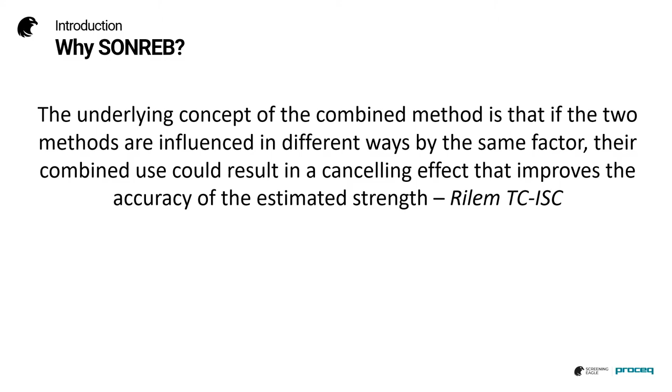The underlying concept of the combined method is that if the two methods are influenced in different ways by the same factor, their combined use could result in a cancelling effect that improves the accuracy of the estimated strength. For example, if we have increased moisture content, the ultrasonic pulse velocity value increases, whereas the rebound value decreases.

This is what EN 13791 has to say about SONREB. The combined use of both UPV and rebound hammer techniques with core strength is a useful technique, but the procedures are not detailed in this document. There are some countries such as Italy and China, for example, where the SONREB method is very well known and there are national guidelines for it.

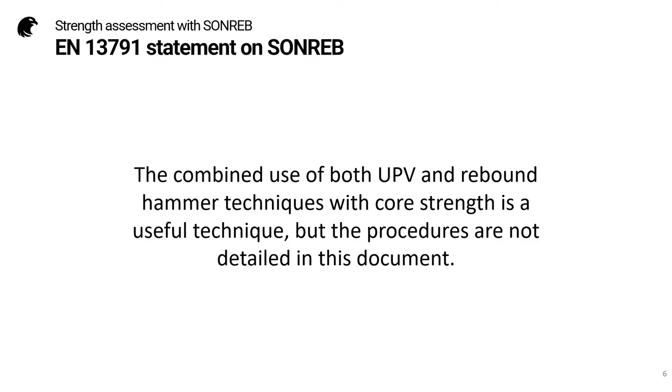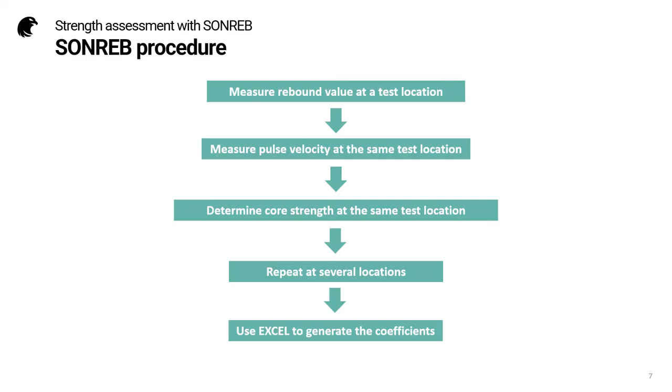And here we can see the SONREB procedure. We measure the rebound value at a test location. We measure the pulse velocity at the same test location. Then we determine the core strength at the same test location. We repeat this at sufficient locations and then use Excel to generate the coefficients.

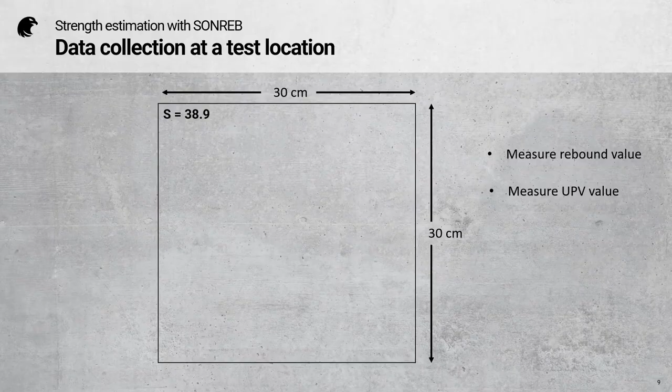Taking it step by step, we first define our test location. In the European standards, this should be approximately 30 by 30 centimeters, and we measure the rebound value. Now at the same test location, we measure the ultrasonic pulse velocity. And the final step is to take a core and determine the core strength.

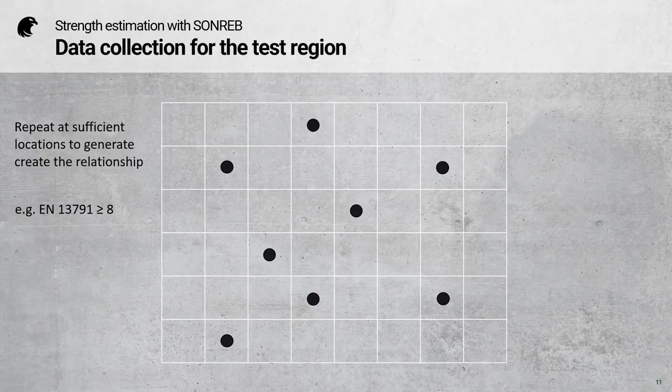And then we repeat this at sufficient locations to generate the relationship. In the European standard, we need at least 8. And now we should have sufficient data to generate the coefficients. Once again, for my example, I'm going to take the data supplied by LNEC in Portugal.

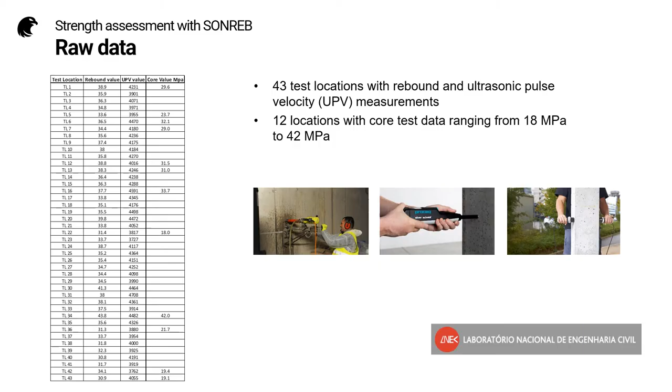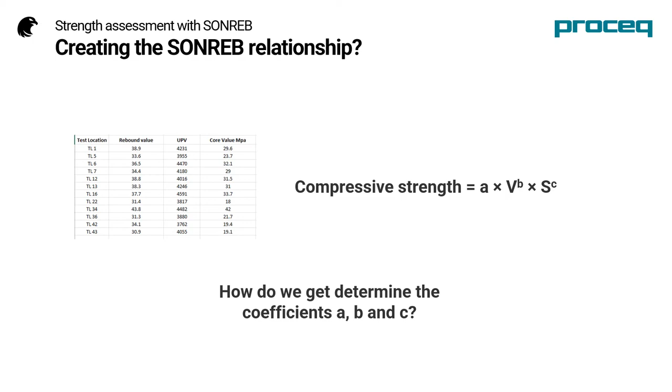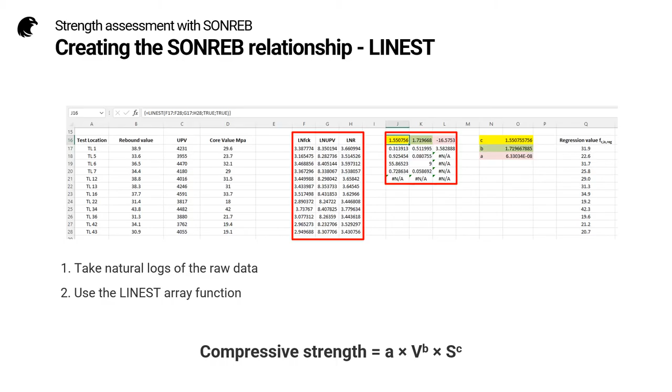Here we can see the raw data, but how do we go about getting the coefficients A, B and C? We cannot use a simple scatter chart as we did previously because we have 3 variables. The way to do it in Excel is to use an array function called LINEST. The first step is to take natural logs of the raw data, and then we use the LINEST array function on this, and finally we obtain the 3 coefficients.

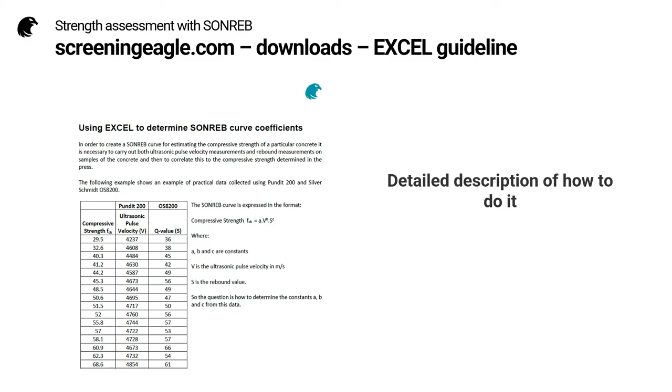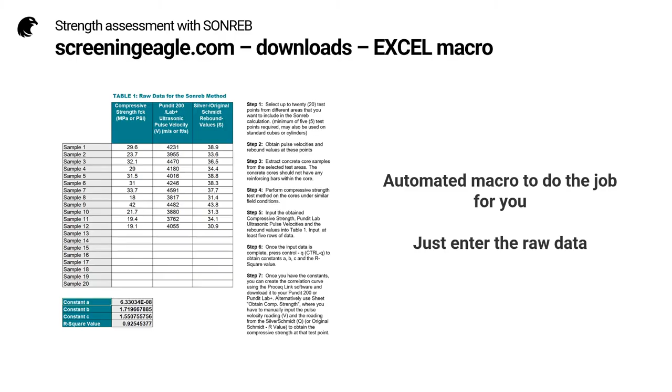If you're not familiar with the LINEST function, don't worry, because help is available on the screeningeagle.com website in the downloads section. There you will find a detailed guideline on how to determine the SONREB coefficients using Excel. Even simpler, there is an automated macro which does the job for you. Just enter the raw data to obtain the coefficients.

Now let's analyze the results to see if the method has brought us anything. We're going to compare 3 cases. First is with rebound hammer alone. The second is with the UPV, and the third is with SONREB. So case 1 is the rebound hammer strength estimation, and here you can see the graph of the regression value against the core strength value, and we have an 86% coefficient of determination.

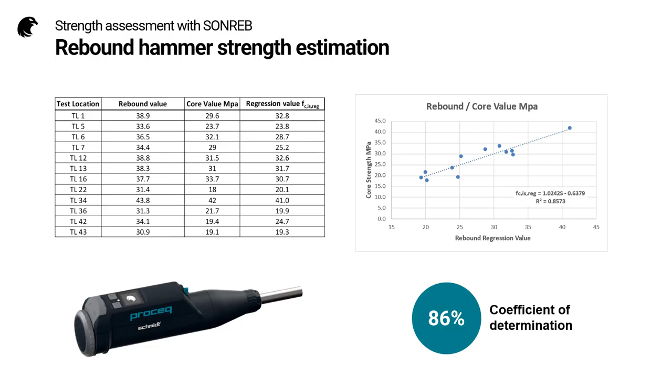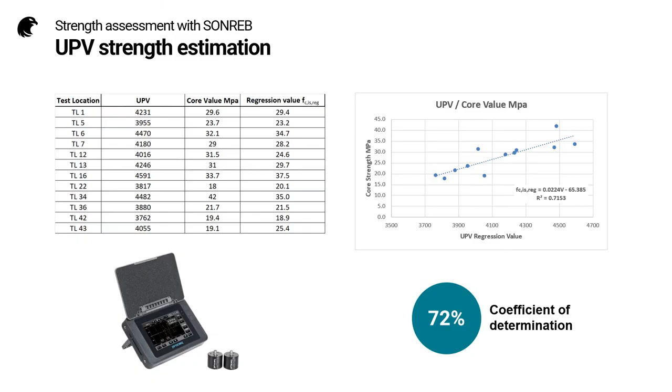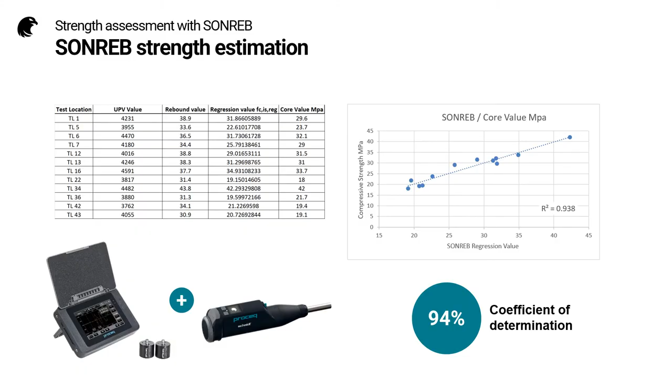Case 2 is to use the UPV regression, and in this case we have a 72% coefficient of determination. And finally, we will use the SONREB regression. And you can see in this case, we have a 94% coefficient of determination, which is a significant improvement on the estimate. And this is why people are drawn to use the SONREB method.

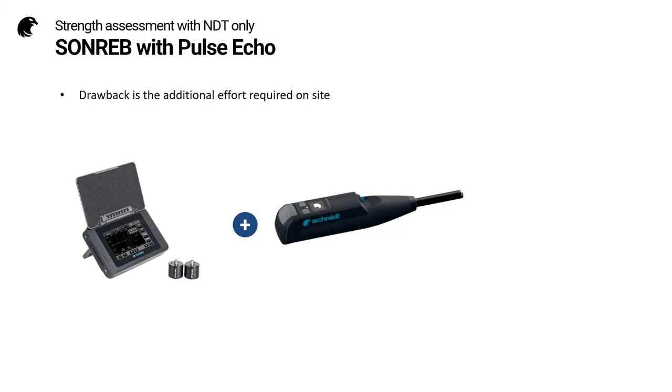The main drawback to the SONREB method is the additional effort required on site, but this effort can be significantly reduced if we use pulse echo to measure the pulse velocity, and this is a technique which I first saw successfully demonstrated at an FIB conference back in 2016, and of course since that time the pulse echo technique has become standardized.

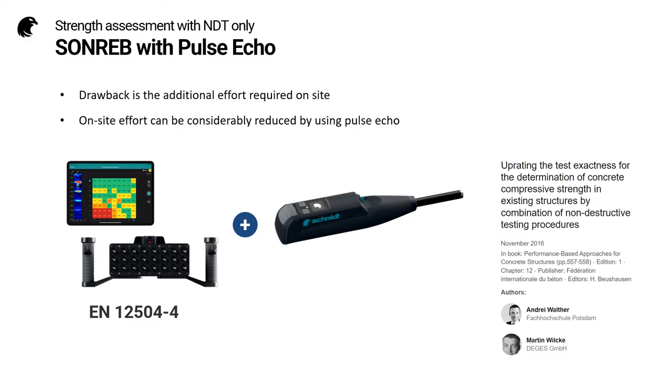So to summarize strength assessment with SONREB, it's a combined method for improved accuracy of the compressive strength estimation. It is recognized but not covered by EN 13791. It provides a regression for mean strength which can be then used at any specific location. On-site effort can be significantly reduced by using pulse echo measurement of UPV.